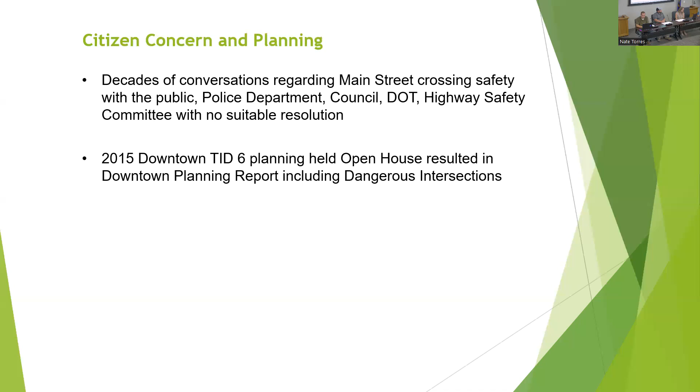In 2015, we had the TID 6 downtown planning meeting, and one of the things we did was identify what people considered dangerous intersections downtown, and all of Main Street was the highest ranking of concern. So that's kind of been the mode of operation for a really long time.

Then in 2019, we had a meeting with the DOT to try to figure out what we can do to help the situation. They said, well, maybe you need to look at some of these new ideas that are coming forward in the design world. And that is why you saw these two projects that have happened.

Last year there was the conversion to the two-way left-hand turn lane, so instead of 4 lanes, there's now 3. And then also the work that we're going to be doing downtown this year. So we were really excited that there was something now that there can be safety improvements in the downtown.

So we hired Strand and Associates, and they've done a number of studies for us. The corridor evaluation was where it started, and it started from the conversations that we had with the DOT about their ideas on how we could improve the flow and the safety of traveling downtown.

Obviously these things don't come without a price tag, and so a really big part of it was, okay, DOT, you're suggesting we make these changes - how are we going to pay for it? They came forward with some pretty significant grants for both projects. Last year's project was a 90% coverage, which is a really huge amount. This year's is the TAP, the Transportation Alternatives Program, which is most notably combined with the Safe Routes to School program about how to get kids to school, and they gave us an 80-20 grant. So that's another big amount of money that came from the DOT.

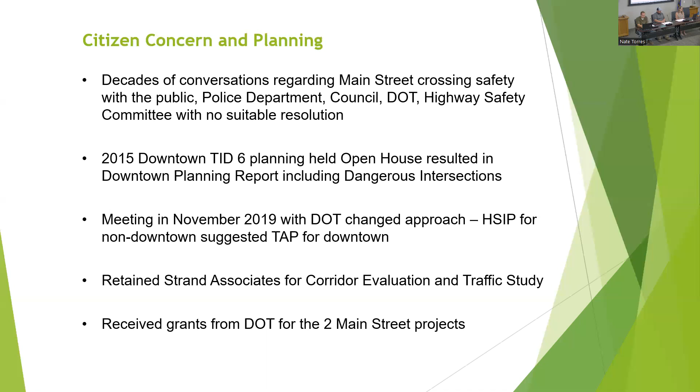So just briefly, why are we doing the things that we're doing? I'll show you in these following slides. The idea is that the bump-outs are shortening the crossing. That improves the amount that pedestrians need to cross, the distance they have unprotected, but also helps vehicles be able to see pedestrians better. So when I think about crossing at Court Street right now, I'm at the bank and I'm kind of sneaking past the cars to make sure that the cars can see me.

That are driving down the street. So this is what that improves, right? You're going to be on a sidewalk, a bump out to the point where you can see and they can see you. It's also intended to improve traffic flow in the downtown.

With these projects, it would be really great if we would have done all of them at the same time, but we just weren't able to do both projects in one year. So right now, some of the things we're experiencing is traffic backing up at Jefferson at the light. That light is moving, and I'll show you that in some future slides.

Also, one of the big things I see all the time is the left-hand turn onto the side streets. Not necessarily at Jefferson, but at Court Street and Terhune, the traffic needs to stop behind the car who's turning left. Sometimes they stop, which obviously impedes flow, but sometimes the driver will drive around the car turning left, and that's a really dangerous move. So what we're trying to provide is the left-hand turn lane so that a left-hand turn is a safe turn.

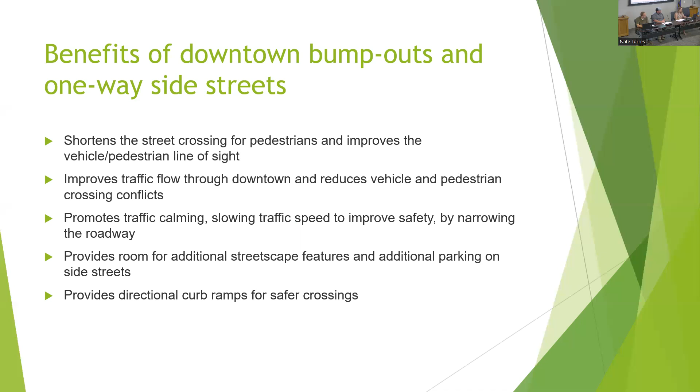So there's a lot here. What I've tried to do is just kind of briefly go through what the changes are. I encourage all of you to look at the website for more information. All of this stuff is on the website. You can always visit it.

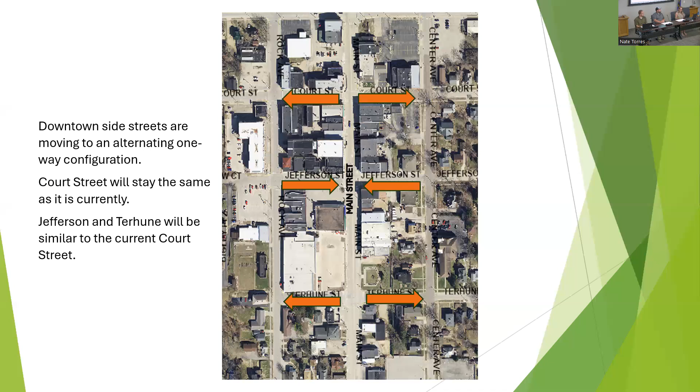And then Jefferson is going to be coming in. So because we want to alternate the one-way directions, right? Take Court Street and flip it towards the traffic towards Main Street, and that's what Jefferson will look like.

So the benefit of the one-way street, besides just controlling the traffic flow coming onto Main Street, is allowing for more parking. If you think about Court Street, think about how many more vehicles you can get on a side street than if you're doing your parallel parking. So that's the benefit that you'll see.

So on East Jefferson will look like this. I can certainly go through, like some people have asked, I have a business next to Jefferson, for example, like Blue Dog. And we're talking about this today, like, which way is the angled parking? Is it on my side or another side? So we can certainly walk through all that with everyone if you don't want to look at the slides that we have online.

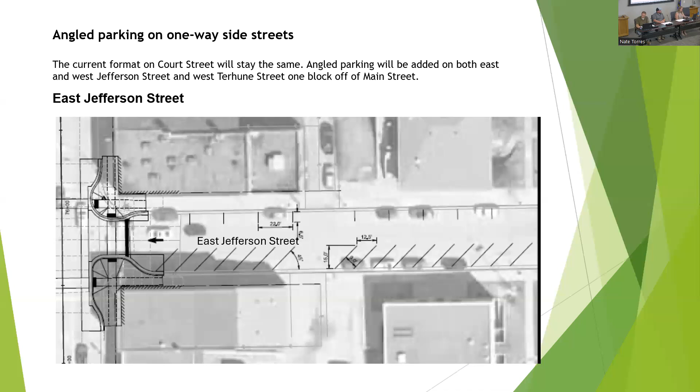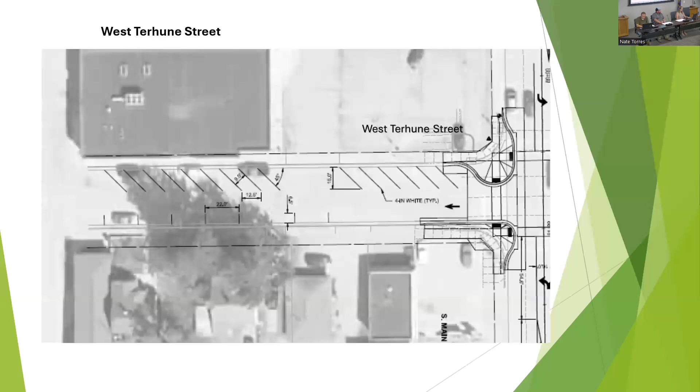I feel like this is one of the major improvements for driving downtown: the left-hand turn bays. Hopefully you can tell by looking at the image, but the yellow is the straight-through or turning-right lane on the outside of each side. If you need to turn left, you're no longer backing up traffic, because people won't have to drive around you to turn left. They'll have their own designated left-hand turn lane. This is what you'll see at Court Street and Terhune.

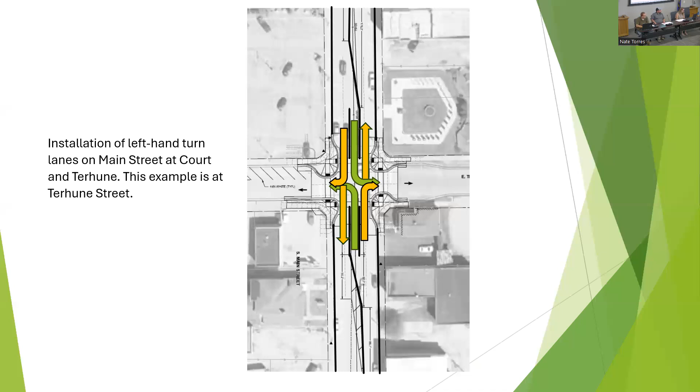The other thing we've heard about for years is making crosswalks more visible. We've tried different styles of painting—I don't know if you've noticed, we had the zebra style with angles, then we went to blocks with alternating white rectangles. But people felt we still needed more. So we're moving to a colored crosswalk, made of red concrete, at the three intersections of Court, Jefferson, and Terhune.

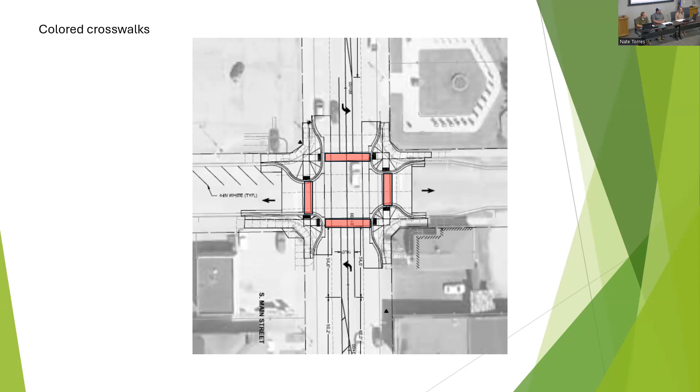Another really big change is the traffic signal at Jefferson. When the DOT looked at it, they said it doesn't warrant a stop light at all. We said we're not switching it unless you give us another one, because people need to cross Main Street so hard. So we do end up moving that signal to South Street, but because Jefferson has always served as such a major crossing point, we wanted to make sure there was still something there for pedestrians.

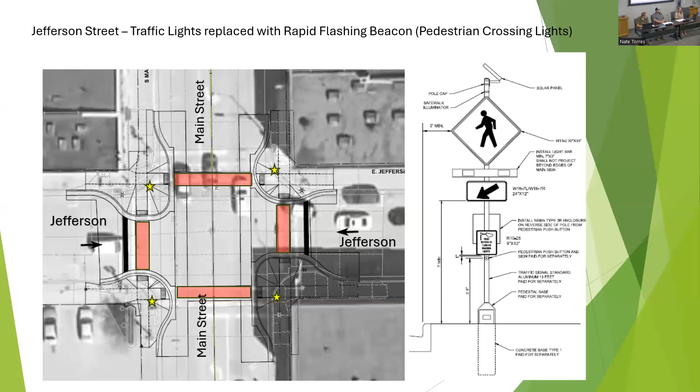You've seen the rapid flashing beacons we installed at Broadway, and we have them at Oak and Maple. That's what we're going to see here at Jefferson, meaning the pedestrian instigates the flashing light, and the light will flash so they can cross.

As I mentioned, we're moving that traffic signal from Jefferson down to South Street, where it will be a sensored signal. The signal will generally stay green on the main line—most traffic is going on Main Street—but when a car comes and sits at the South Street intersection, it will trigger the light to turn.

The idea is that when we see those really big queues on South Street trying to cross—when I drive my kids to school, I often try to take this route and it's almost impossible to cross when it's busy—you'll be able to cross freely. You'll also be able to make those left-hand turns that end up backing up traffic there. And since it's a signal, you can still turn right on red.

For those very interested in what's happening at the old City Hall site, since I get that question all the time: what's happening immediately is we're moving that radius back further, meaning the curb is going back into the property about 15 feet. This is largely because that turn is such a hard thing for big trucks to navigate, as shown by our continued struggle to keep the signal in its place.

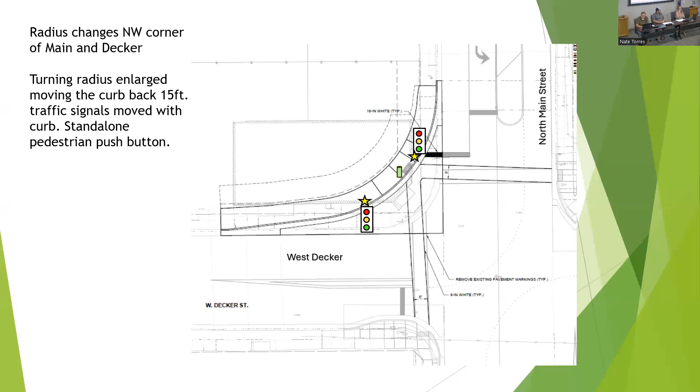So that's what's happening, and we've had that information up for a while. Obviously it's good to share with the public over and over.

But the big thing we wanted to talk about today was what is going to happen to get there, because that's obviously not easy. You see our neighbors going through the same thing to the north. So we're always going to have Highway 14 open, so Main Street will always have traffic flowing.

But what is not going to be there is the parking, so parking is going to have to occur on the side streets. We've been working very diligently, Strand put a lot of this together, and Chippewa also. We've been having meetings trying to work through all these fine details of how to keep the hospital access open and make sure that when we're working at South Street, everybody can still get into the clinic and emergency vehicles can get through.

Even today we changed our plans slightly because we wanted to make sure the hospital had proper access. For the first part, we're going to have traffic on the outside lanes, and they'll be working on those interior areas to change the color of the concrete. So again, parking on side streets. There will not be construction yet on the side streets, but they'll still be in that parallel configuration, except for Court Street.

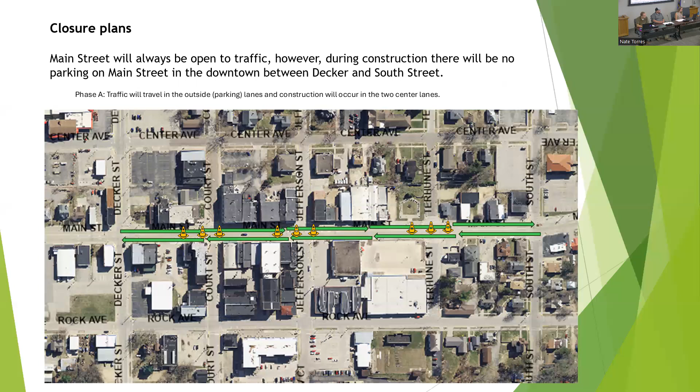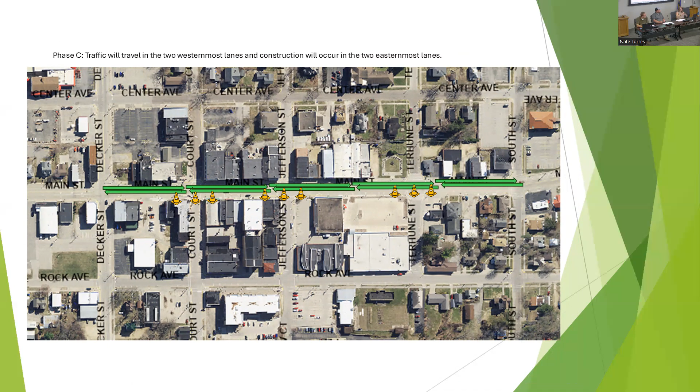And then, yes, I did get this right—no, I got it wrong, didn't I? You're doing the west side first. Okay, hold on, this one's the first that's going to happen. We're moving all the traffic to the east side of the street and working on the west side, so traffic will be side by side instead of split. Then what I just showed you, we're going to flip to the other side and do the same configuration, but the traffic will be on the west.

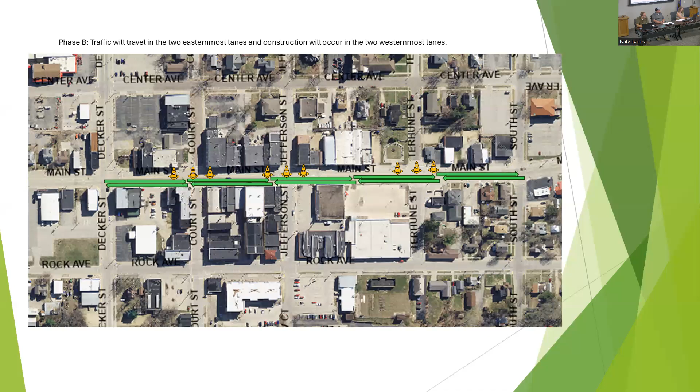So I tried to do a little bit of color coding to make this helpful. It's easier to see online, but essentially when we start working on those bump outs, we're doing it in 4 phases, 4 main phases. It's going to start with the west side work. As you saw, we're moving the traffic onto the east side, and they're going to do the 2 bump outs at Court and Terhune, intentionally staggering the work.

And then they're going to switch, keep all the traffic on the same side, and work on Jefferson and South Street. As soon as these are in, they become one-way streets because of the width—there's about 22 feet, which is tight for 2-way traffic. So those will be converted right away.

The other idea too is that once we get this in, if we can get the angled parking painted on, we're going to gain that parking, so the parking that's lost on Main Street just for the construction part will be better served on those other side streets.

Then we're going to flip to the other side of the street—oh, and I didn't change my phases, they're still in order, you can tell we changed this literally on the fly right before this meeting. So South Street and Jefferson is going to go first because we want to maintain access for the hospital. Then Terhune and Court Street are going to go together for the last of the quadrants, or the bump outs.

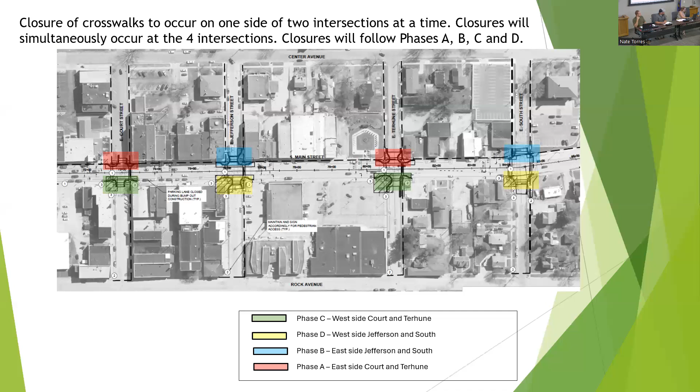There'll be a left-hand turn lane like there is now, but it's just painted. At South Street, the physical curb doesn't really change. There's work happening on it, but it's all related to making sure the curb ramps are ADA compliant.

So if you can do it now, you'll be able to do it then.

I was actually thinking about that the other night, how are we going to go through the maintenance of it? I'd say that's a little bit beyond your normal citizen responsibility. So in terms of delivery, long term, we have the ability to decide how we're going to have parking.

On Main Street, the side streets are angled parking. That's going to be laid out as part of the project. But we've always painted the Main Street parking ourselves at the city, so we have some flexibility about how we're doing it. And it's obvious, for you guys, Rockweilers, that area where you don't have any, it's supposed to be a turning area, but you're using it.